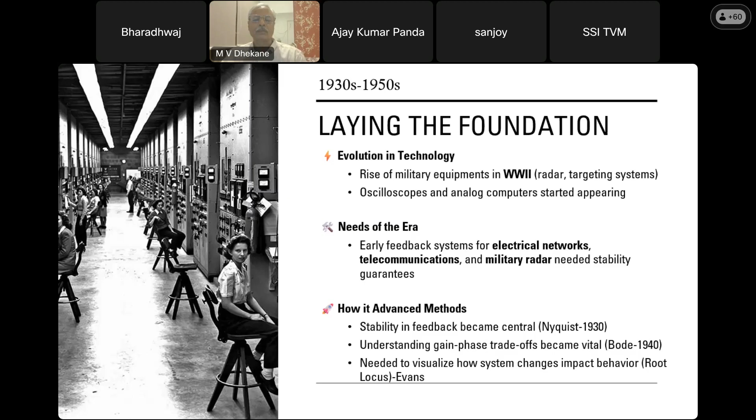So till this time, probably there was no systematic way to analyze stability under feedback before deployment, which means that we have some open loop system, we have designed certain gains or compensators, and we are going to close the feedback loop. Before we close the loop, we should understand whether the system is going to be stable or not. And these seminal papers written by Nyquist, Bode, and so on really brought out how things are to be analyzed.

Many of us know about the Nyquist criterion. If we have P unstable poles in the open loop system, and we go for a polar plot, evaluating the open loop transfer function for j omega from 0 to infinity, with the right half covered in a closed contour, we can get this closed loop system stable from that particular equation, Z = N + P.

So all these things basically gave an idea how by graphical methods one could derive the stability of the system.

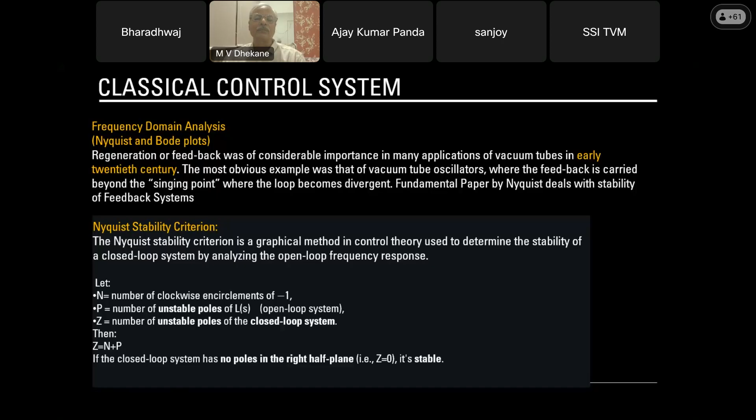Bode's integral theorem is another foundational result in control theory that provides deep insight into the limitations of feedback control. Sensitivity function: one interesting thing people read about is the waterbed effect. Gain reduction in one frequency range must be compensated by gain increase in another, particularly when the plant has unstable poles or right half plane zeros.

And the right half plane zeros, how they limit the achievable bandwidths or achievable robustness, all these things are brought out nicely by Bode's paper in the 1940s.

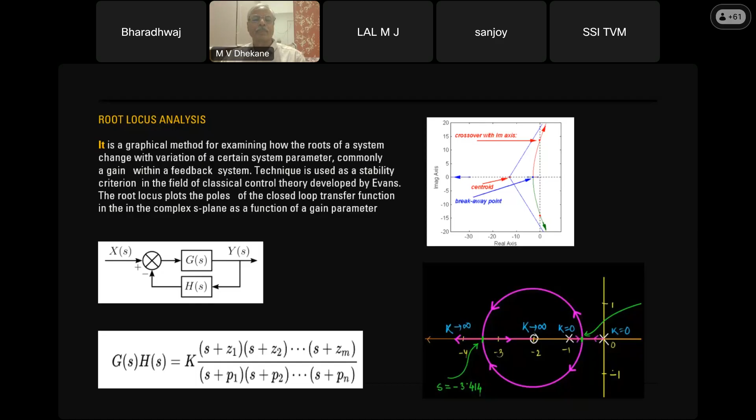Root locus is again another graphical method where from the open loop transfer function roots, we are able to get an idea about the closed loop poles as a function of, say, a gain parameter. Gain changed from 0 to infinity. The poles will migrate and they will eventually go to zeros as the gain goes to infinity. But then for a particular design gain, we will be getting the required pole formation, which basically defines our system.

Now, once we entered the 50s, 60s and all, control became more practical. More and more industrial plants, automation, manufacturing, all these things started coming up. Early space race: in 1957, the first satellite went into space, and then the space race started. That was driving the advances in navigation and tracking. So the need of the era was control systems needed to react in real time for industrial automation and aviation.

And then various problems like sensor data, which has got noise, data was not clean. How do you extract the correct signal out of it? And also the control systems, in a classical control way, PID controllers came into picture. So in 1942, Ziegler and Nichols introduced tuning rules to set suitable parameters like Kp, Kd, Ki. And these techniques became very popular, and they started being used widely in industry.

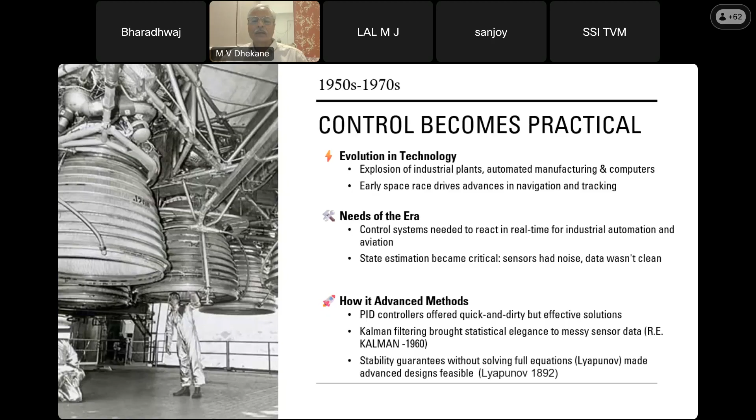And Lyapunov theory. Now the interesting part again is that Lyapunov theory was brought out in 1892, but its actual application started coming up in the 50s, 60s, and so on. And then it became a very important tool to guarantee stability. Many times such things happen, like mathematical developments take place much earlier. Their applications come up after some 30, 40 years.

Another beautiful example is the Moore-Penrose pseudo-inverse. In the 1920s, Moore had proposed the pseudo-inverse concept for rectangular matrices, and its application came up only in the 60s.

PID, as you know very well: proportional control defines the bandwidth, speed of response, and reacts to the present error, whereas the integral term corrects past errors and reduces steady state error, whereas derivative predicts future error and improves the damping. So this PID controller has been used in many control systems, especially for chemical plants. It became very handy, and PID tuning was an integral part of chemical plant control.

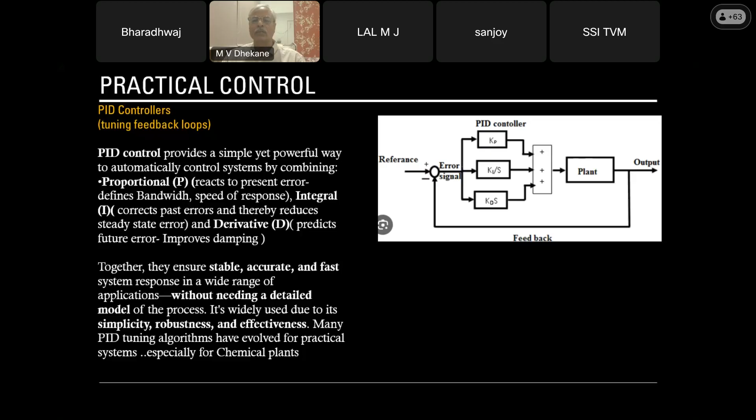In our aerospace, if you look at the attitude data with multiple sensors, we are using Kalman filters for extracting the best estimate, especially for position and velocity. The accelerometer data is augmented by GPS data, and then again Kalman filter algorithms are used for getting the best estimates.

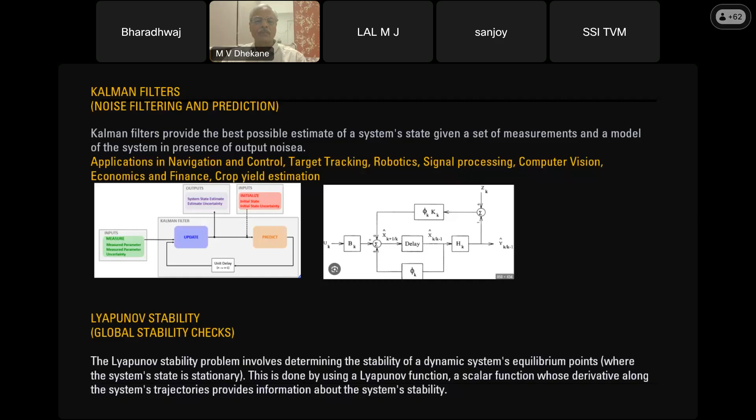The Lyapunov stability problem involved determining the stability of dynamical systems, etc. Moving to the 60s and 80s, digital computers became stronger and cheaper, space missions became more complex, mathematical control theories matured, and dynamic programming came into existence. I mean, its applications started growing.

So, especially for rocketry, with high fuel costs, optimal control became a very important and challenging thing. All the spacecraft, missiles, and satellites needed precise control. And here, matrix methods with state space analysis, state space models, which formalized full system knowledge rather than surface outputs, and LQR kind of techniques became very popular.

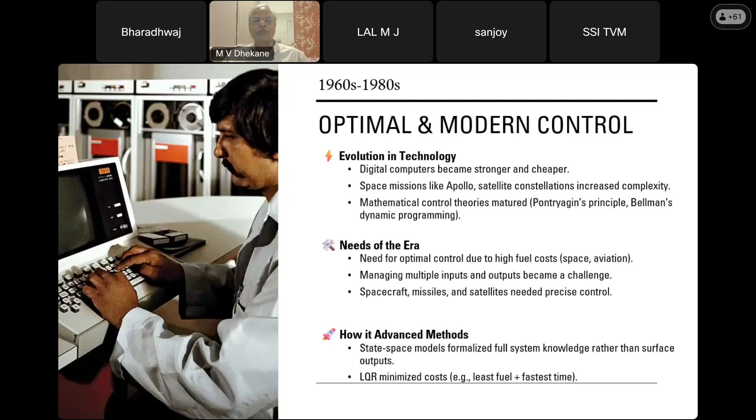So state space representation becomes important as it provides a comprehensive, flexible, and scalable way to model and analyze dynamical systems, especially multi-input, multi-output systems. Once you define the dynamics in the form x dot = Ax + Bu, y = Cx + Du, one can go to development of transfer functions, analysis, and matrix algebra, which enables many mathematical tools. All these things become much easier. And especially it was useful for expressing MIMO systems.

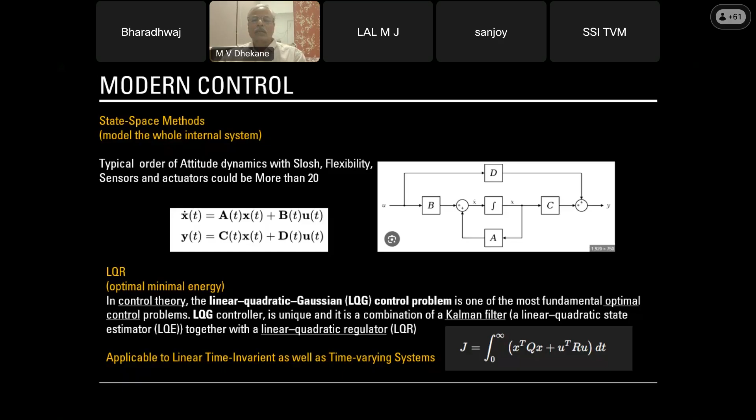The LQR techniques, LQG, LQR, then loop transfer recovery, LTR techniques, all these things became operational in this era. Now, somewhere between the 80s and 90s, industrial robotics started rising. Computer power had increased, sensors advanced, and widespread use of computer-aided control system design tools had come up.

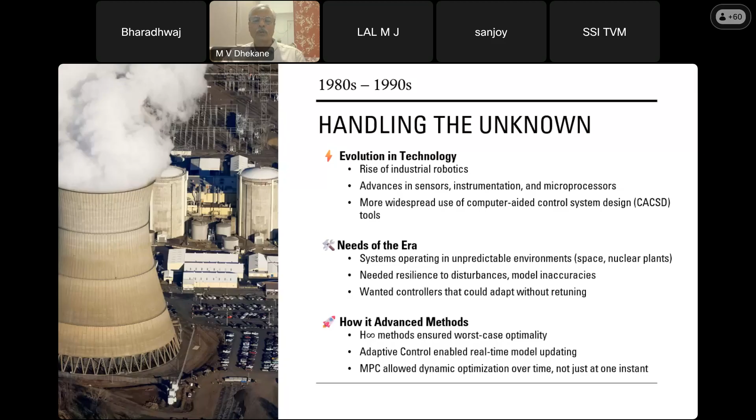So basically the need for developing new methods was again based on the control of plants with unpredictable environments. We have to handle model inaccuracies, disturbance rejection, and robustness for the controllers. All these things gave rise to new advanced methods like H infinity, adaptive control, model predictive control. H infinity, of course, is an advanced control method designed to achieve robust performance and stability in presence of model uncertainties and disturbances.

Whereas adaptive control adapts itself to variations in the controlled system's dynamics or external disturbances. You have a process, and the input and output of the process are used to estimate the update in the control parameters, and that way it changes the controller and goes on. So if there are some changes in the process, they get estimated and go into the control parameter change.

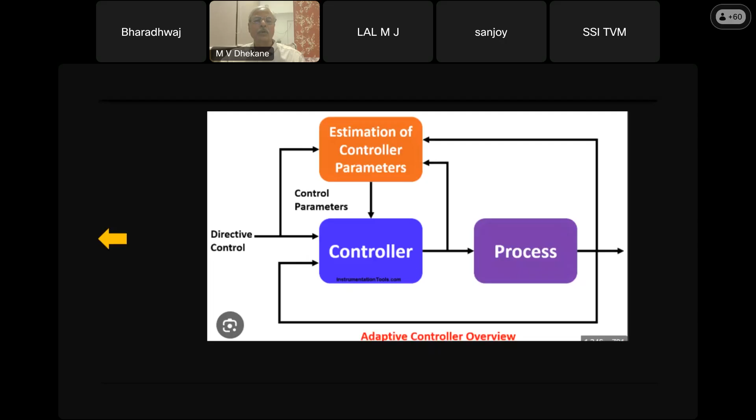Model predictive control predicts future behavior and optimizes control actions. Launch vehicle guidance is an excellent example for these things. Interplanetary missions, Mars, moon landing, where we may have to predict the future behavior and take certain actions.

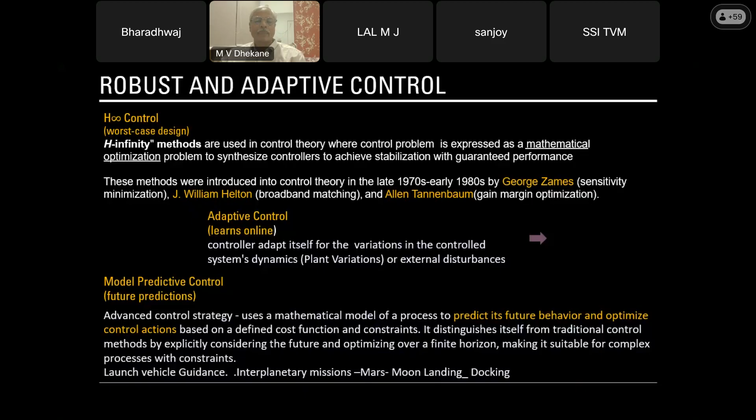Now, the last decade of the 20th century was like an explosion of computers and AI techniques. AI techniques started emerging, neural networks, expert systems, etc. High precision sensors and actuators were already in the picture, microcontrollers, embedded systems. There was a boom. One would have come across fuzzy logic in washing machines. With all these things, we were getting into more and more intelligent systems.

The system models did not remain just linear. Various nonlinear models could be, or had to be, controlled directly. So one can come across Zadeh's paper of 1965, Utkin's paper of 1960, fuzzy logic, sliding mode control, then optimal trajectory planning, etc. These papers had come up in the 60s, but their applications started coming up in this decade.

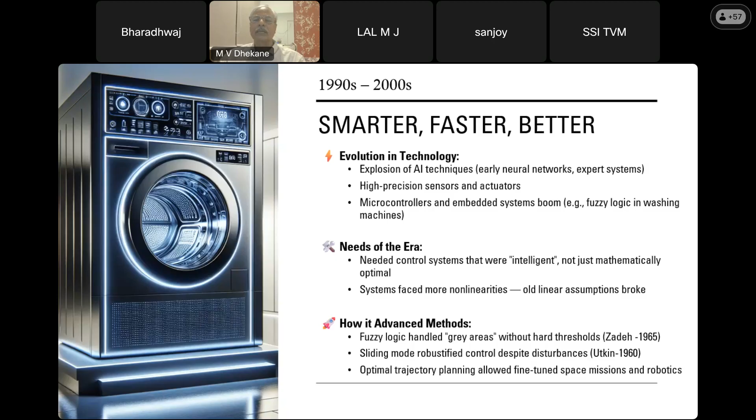Fuzzy logic controllers use linguistic terms. Fuzziness is included in the algorithms, and these tools map inputs to outputs, allowing them to adapt to changing conditions. It was really a major breakthrough in the field of artificial intelligence.

Sliding mode control is another nonlinear control method that alters the dynamics of a nonlinear system by applying discontinuous control signals. That became very crucial, very useful for many systems where we could demonstrate robust action through sliding mode control.

Optimal path planning. For those who have been working in rocketry, that's not a new subject now, because right from liftoff till the end of the trajectory, placing the satellite into orbit, calculus of variations is used, and then trajectory optimization. All these things are part of our day-to-day business nowadays. Multidisciplinary optimization, MDO, is emerging. All these things are part of our regular work nowadays.

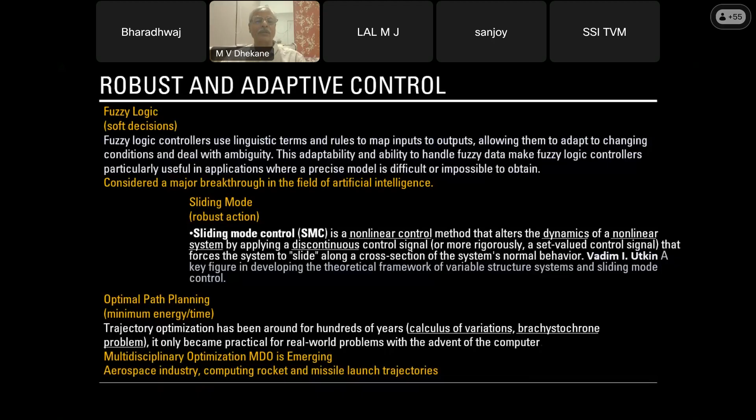So now beyond 2000, what are the things? Internet of Things, wireless communication, quantum computing, AI and ML, all these things started emerging. Now I think AI and ML has become part of the syllabus in many engineering courses.

For drones, satellite constellations, all these things, they again needed some new developments. So AI models, distributed control, quantum computing, quantum control, all these things started becoming a regular feature. So these are now new milestones in the last 10-15 years probably.

Like a neural network, all of you know that it is an artificial mathematical model used to approximate nonlinear functions. So you have some input layer, hidden layer for computing, and then the output layer. So again, neural networks became useful for facial recognition, handwriting recognition, general game playing, and so many things.

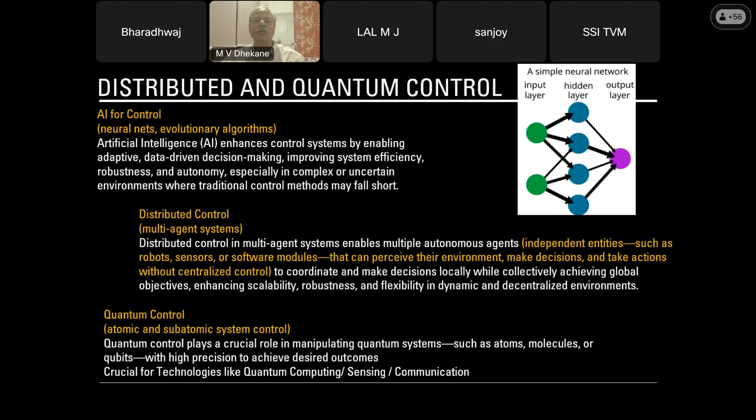Now, these are all emerging fields, along with maybe in the next decade or two decades, we will be seeing self-healing systems that detect, adapt, fix autonomously, explainable control decisions, critical for safety-critical AI development. For quantum computers, some quantum resilient control will be developing now.

Biohybrid control. There are now n number of fields which are emerging, and I think this journey will continue for many decades now, transforming the entire control things into AI controlled systems probably.

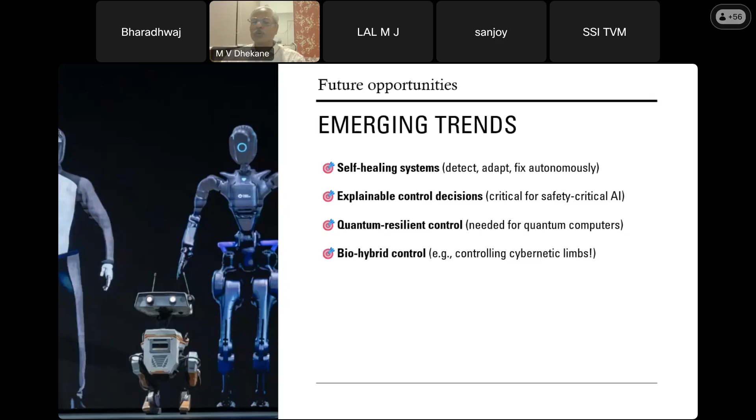So with this, I think I will end my presentation. Thank you all for listening patiently. I just tried to touch upon important works, but no way is it exhaustive. There are many important and very crucial papers. Probably I would have missed nonlinear systems and so many things. I just thought I will project it in this forum so that those who are interested in looking into the history of control systems can work on these things and then look for some new ideas.